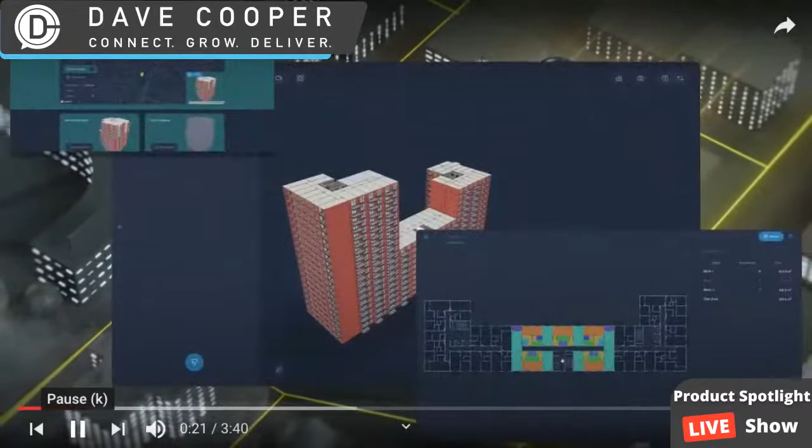Kreo Modular is a groundbreaking new feasibility tool for 3D volumetric modular construction. With design for manufacture and assembly in mind, we envisage stakeholders working collaboratively in real time on this platform, finding the optimal design cost trade-off for their scheme at the earliest stage. This video will give you a quick overview of how it works.

First, we need to digitalize your 3D volumetric components. You teach us how these components or modules can connect together to form modular units - for example, an apartment. We will then generate a multitude of different options for how these units can fit together into a single building block and work with you to select the most desirable layouts. Your rates information is also added at this point. Once this service is completed on the back end, we can begin to use the application.

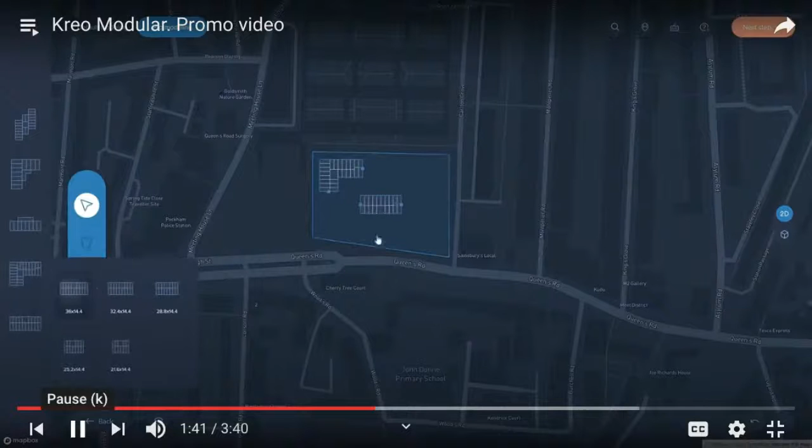First, you should find the site that you have in mind for your development. Draw the footprint of your site using one of our two design methods. First is default modeling, where you set the perimeters of your site, and our intelligent engine provides the best design options for you. Second is pro modeling, where you set out your site perimeter and then drag and drop from a sizable library of preset layouts that you selected during the database creation phase. With both modeling options, you are able to edit the 3D massing of each building block.

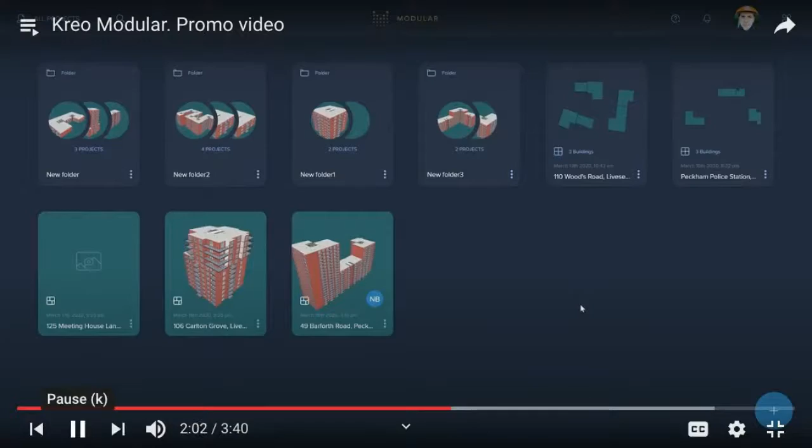I don't know if it froze up on us or not there.

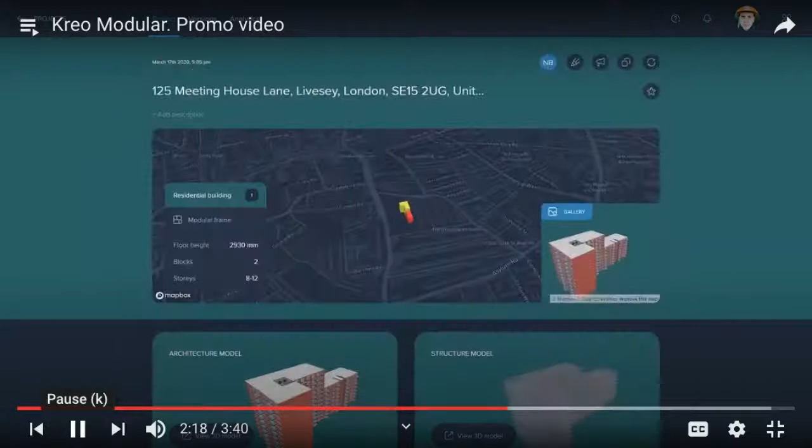The model that is produced is exportable directly to Revit, as is the structural and MEP models, but only if these disciplines have been included in your module design. You are able to edit unit mixes throughout the whole building or on specific floors. View your key metrics that are pulled directly from your model, such as the unit mix summary, the area schedule summary, and the cost breakdown summary.

Please note that these are based on your own rates, but are also editable within the application. The reports for each design iteration can be exported directly to Excel for you to compare at your convenience away from our application. Similarly, you can directly compare your creations using our versions tab. Thank you for watching, and see you in the application.

All right. So, I don't know if I froze up for a second here on this end, but that's the value and love of live streaming. So Adrian, let's jump into this.

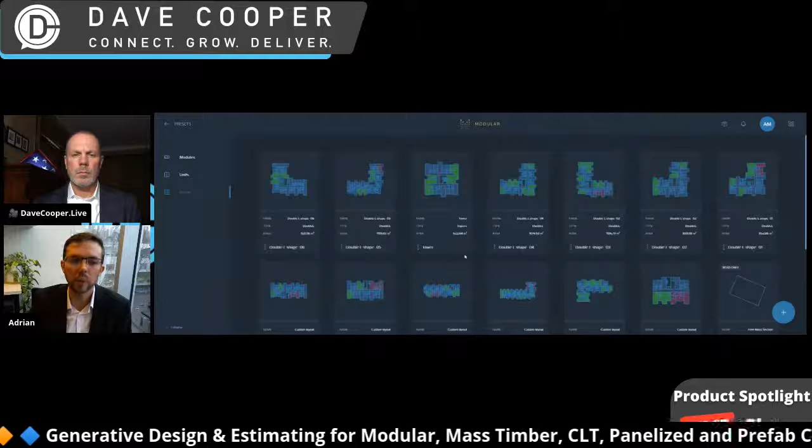I'll show you a quick example of what a library consists of, since this question came up. So we've got our individual modules here, and these are part of the source code, I guess, for our algorithm. Then we've got our blocks, and our blocks are groupings of these modules. This is how we generate our building types - this is what we're pulling from.

So let's go back home and we'll start a new project here. This is set up per whatever manufacturer you are. So if you're a manufacturer, you're going to have your own set of libraries that you already use. You're going to have your own set of blocks, and that's how the program's set up.

Is that accurate? That's correct. Yeah, we'll put in your own modules.

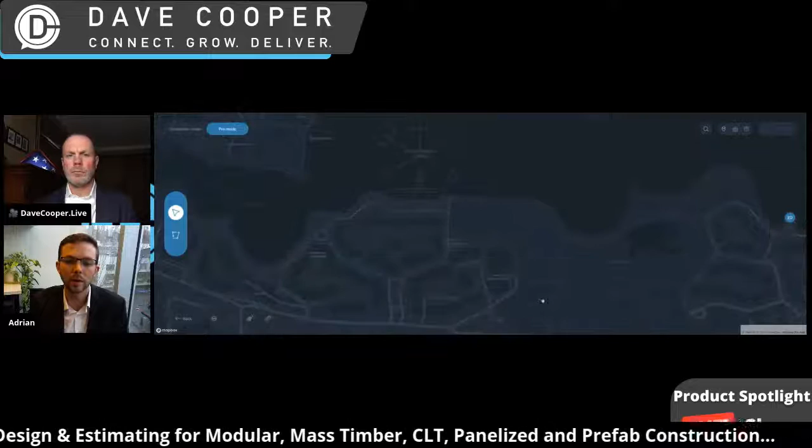The reason this is important is because every manufacturer is going to have different limitations and different strengths. So we don't want to just use a standardized kit of parts and library. We really want to have a library that's designed around our manufacturer's focus and strengths.

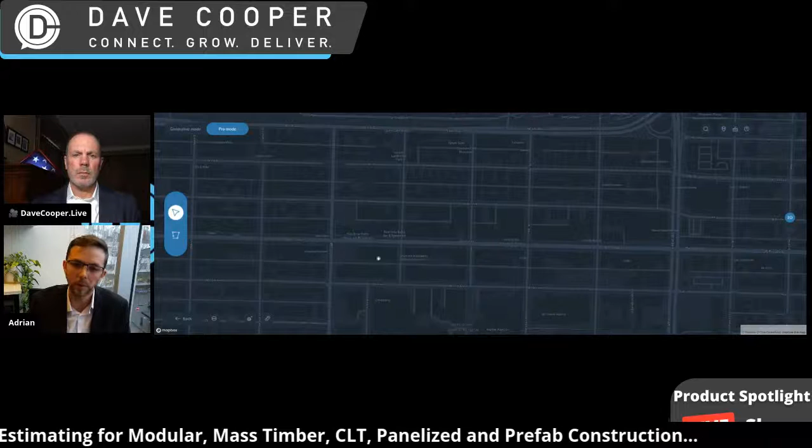So first thing we're going to do is find the location of this project that we're trying to conceive. I'm here in Vancouver, so it automatically pulls me up into Vancouver. Here's Vancouver - I'm going to zoom in on a potential lot, perhaps.

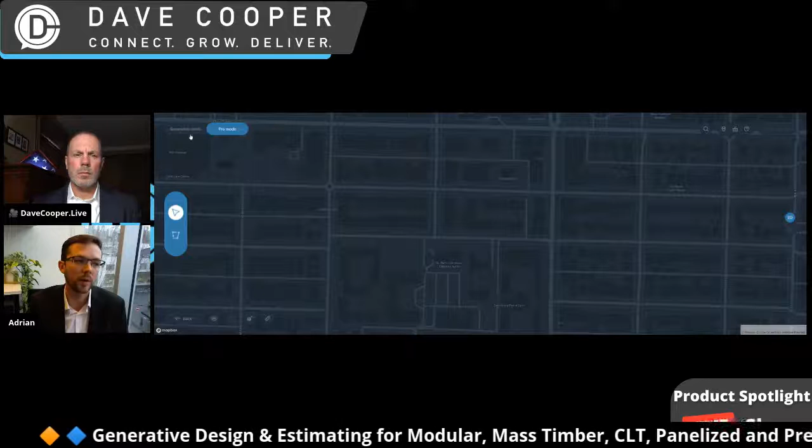We've got two modes - a pro mode and a generative mode. This is great because the pro mode is a more drag and drop method to design a smaller or more basic solution. So if we're designing a small project and don't necessarily need a generative tool, we've got blocks that we want to drag and drop and put together to design our building, we can do that.

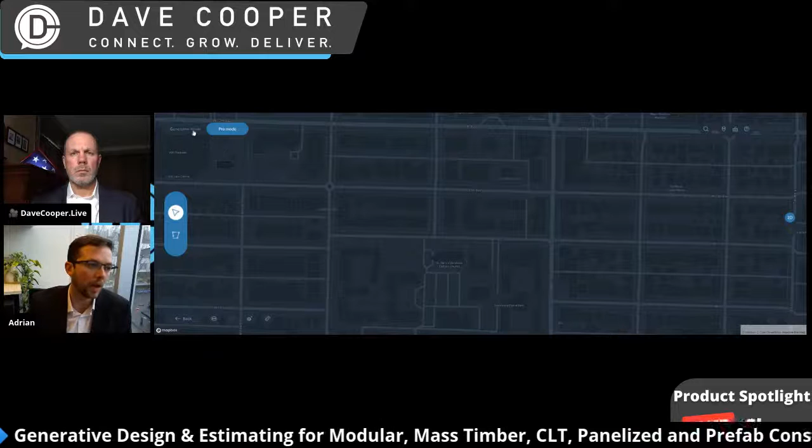But I'm not going to go through that today. I'm going to go through and just quickly show you the generative mode, because this is the part that I think is really cool, and it's what we're really known for at Creo.

So I'm going to start by plotting out a potential site. This would be perhaps a piece of land that our client owns and they want to develop a modular project on. So I'll connect all those dots - that's our site. And then based on the settings that we've got here, or the limitations...

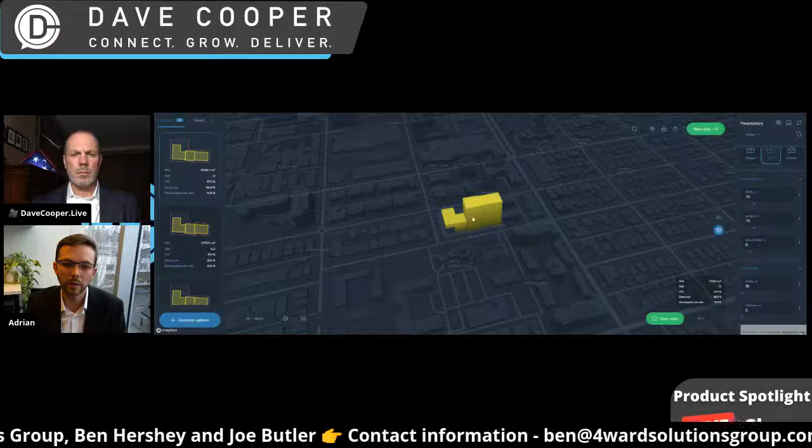Here are a bunch of limitations that we can adjust, including number of stories. We get a solution. This solution, we can quickly have a look at it in 3D if we want, see how the massing looks. We can isolate different blocks and modify them as well if we want to.

Over here, we can even go - we get a bunch of different options over here. We can have a look at all the options our algorithm generated for this site. So we'll give it a second and it'll pop up a whole bunch of different algorithms. Now, these generative options are coming from our library and our kit of parts.

So here we're getting the ability to quickly compare based on some key data sets, which one might be the best for us. And if we're sitting with our client at this stage, now we can get our client involved in helping us come up with a solution.

And maybe if this is a net zero or a passive house project and we want to take a look at the direct sunlight, that might be important. Or maybe we want to look at the FAR level for this site, or the site ratios. So this is going to help us choose. I'm going to, for fun, just choose this one.

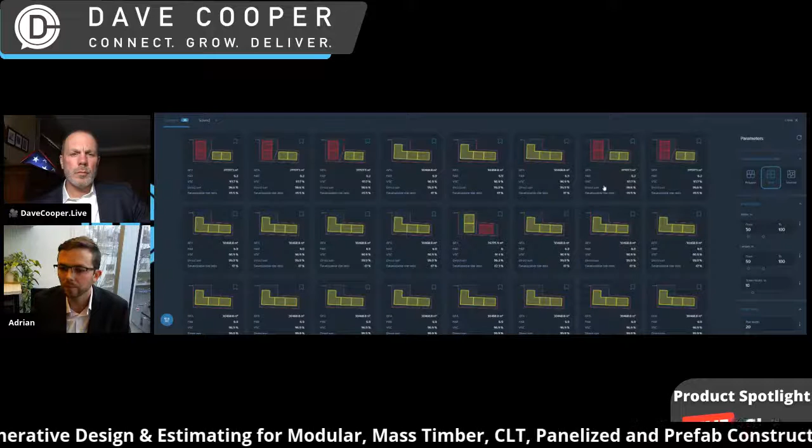Let's go here. We'll replace. Now we'll close. And so I've chosen this site.

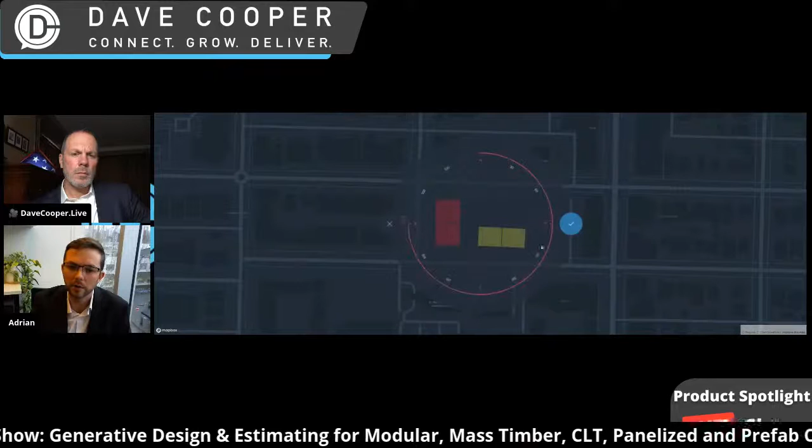So I'll move ahead and we'll get to the end of this process because it's a pretty quick process. We'll give it a second. It's going to go back to our home screen now. And now that it's taken us back to our home screen, here's the project that we just created.

In the background right now, our algorithms are computing all the takeoffs, all the details for this building. So we're going to get an architectural drawing, floor plate plans, and a takeoff of all the components in the building structurally. I'll show you an example of what it looks like when it's done. It takes about 3 or 4 minutes to complete.

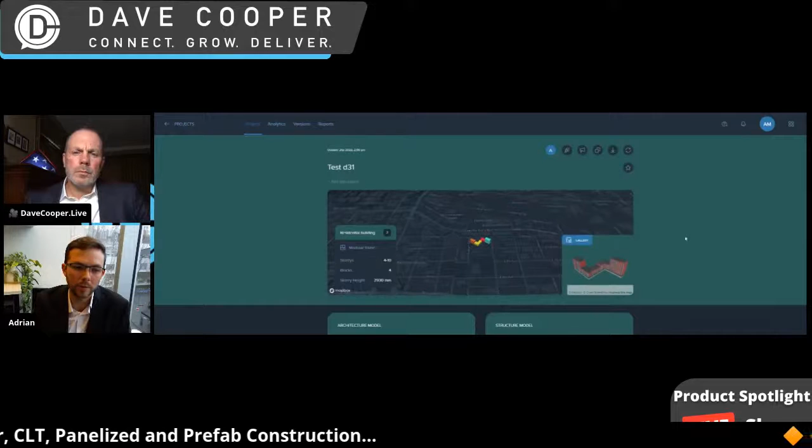So I'm going to go over to a project that's already done. It's a much larger project, but I'll give you an example of the kind of analytics and reports we get after about 3 or 4 minutes of waiting. So here's the main page of our completed project. It gives us a little bit of data here.

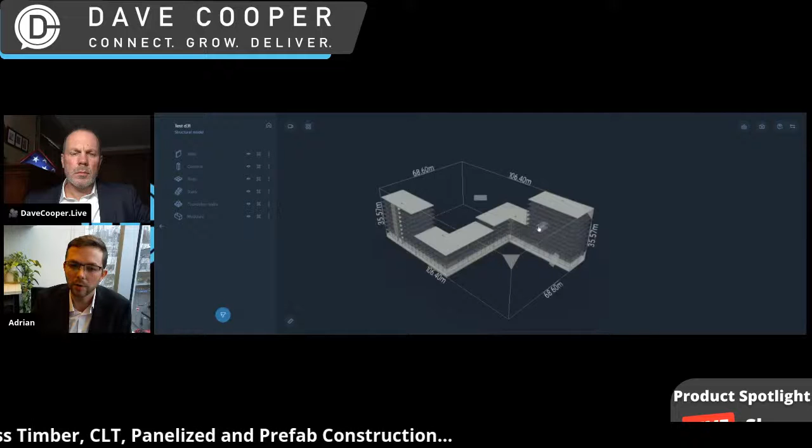So we get a structural model, and we can collect the structural model and really hone in on the different elements of the project. So if I want, I can find an actual module. This is a steel-based system, and we'll have primary and secondary load members. We can manipulate the model. We've also got our cores, our concrete cores, and slabs here as well. So that's pretty neat.

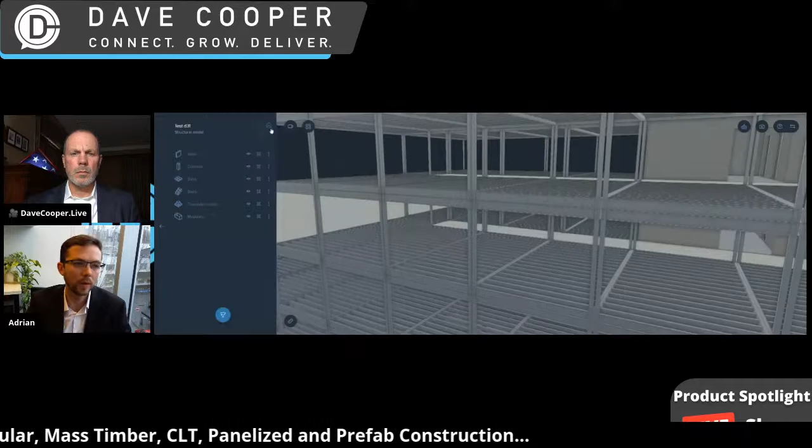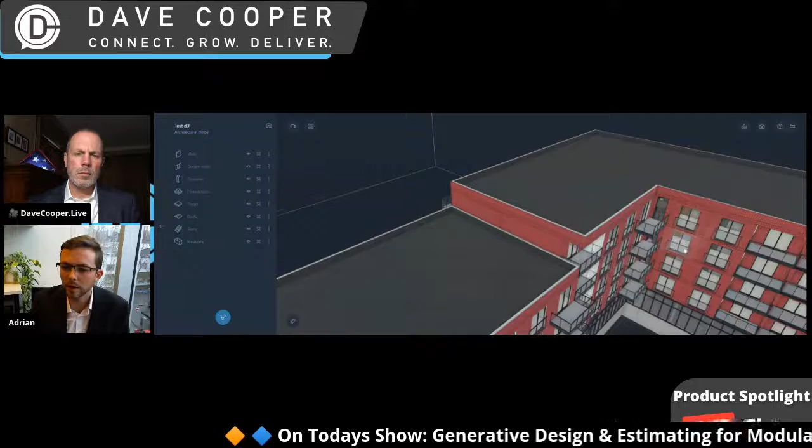We can go back home here. We get an architectural model as well. So if we want to show a client exactly what the project is going to look like, maybe you want to zoom in and isolate a module and check out the layout and partition walls, we can do that.

So that was showing, as Henry Mickelberg was asking, the facade and the balconies on this particular model. So let me get this right.

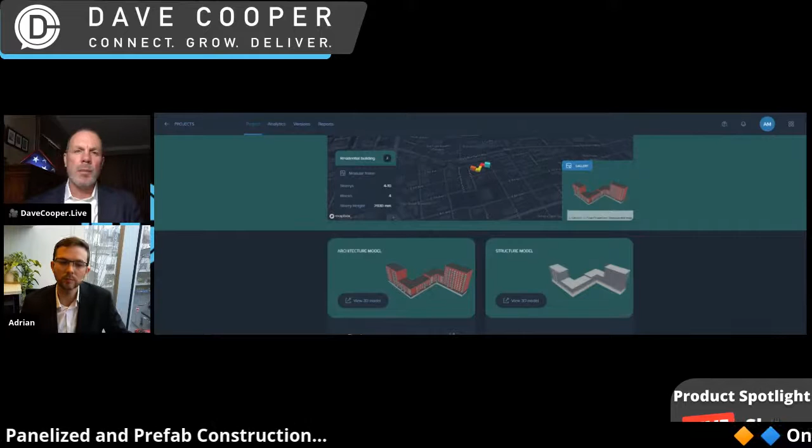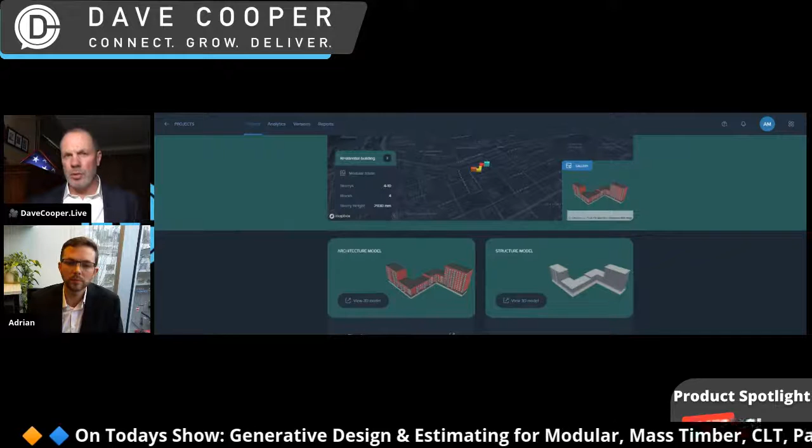And I know the comment came up with some other generative design tools like Archistar and so forth. But basically, where your platform seems to be super strong is you find the lot, you plug in the parameters, the zoning, the codes yourself versus the system generating that for you. But then your program takes that and generates multiple options of what you could potentially develop on this site. And then you choose from those options. And once you choose from those options, it takes 3 or 4 minutes to generate that design to the details that you have specified for your manufacturing facility.

So it's not just a conceptual design, it's a super detailed design, and this all happens within just a few minutes. And I think that's where the power of this really comes in, because now you can take what you just showed us, that big building, within a day and walk a client through what your options are.

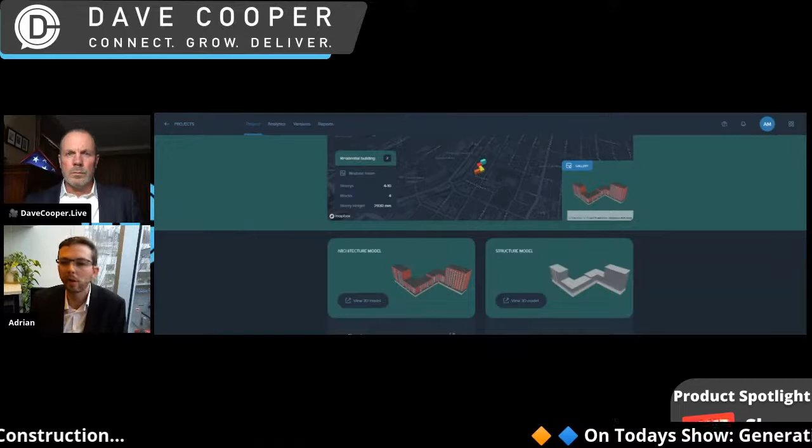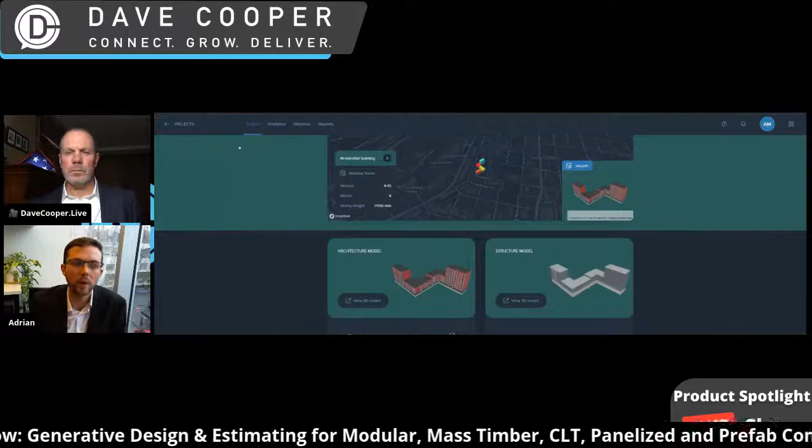That's correct. And that's why I think it's really going to be beneficial to a lot of manufacturers who unfortunately have to turn clients away because they don't have time to develop something like this and price it out for a client that isn't what I would call qualified. Right, so now you're able to widen the net and lower your acquisition cost on projects.

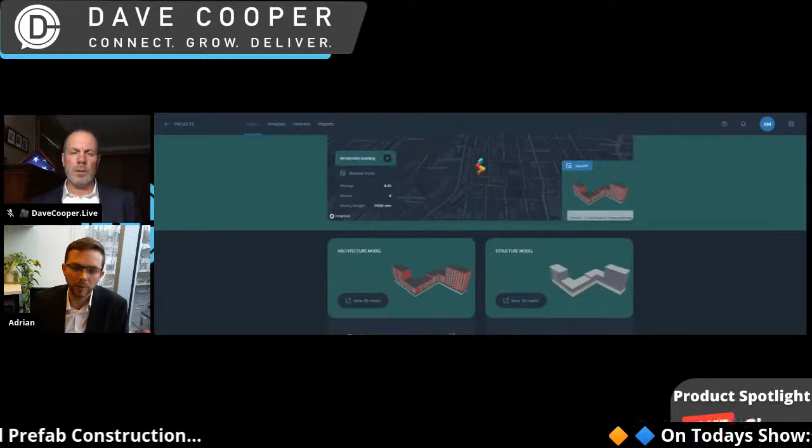And I think the other cool thing is you're providing a client experience that is very complementary to the construction experience that client is going to have later in the project. It's extremely innovative, it's fun, it's exciting, and it's fast and accurate and high quality.

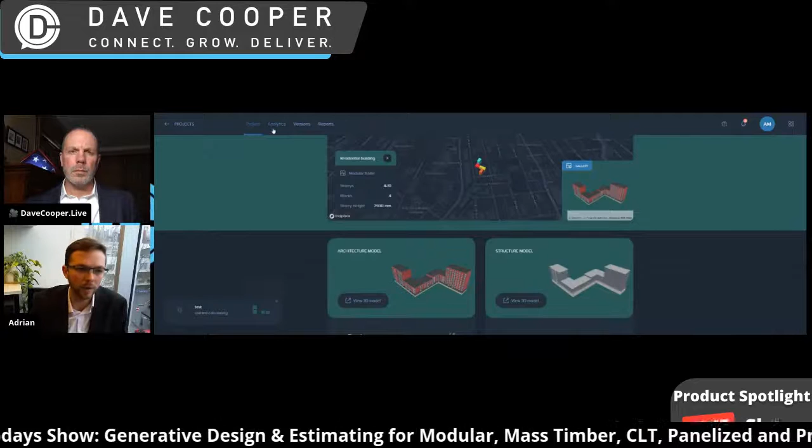I'll give you another example of some of the data that we get here because this is powerful, and this is what's going to help that client make the decision to move forward with you, and it's also what's going to really help your estimating team. So here's an example of the data that we get, and of course this is data that's assembled based on that individual module and those individual groupings' cost.

So you do have to do a little bit of work on the front end when we're putting your library in with your estimating team to cost out those modules, and also if you're looking at non-modular costs like demolition or foundation work. There may be some averaging and costing you have to put in if you choose to present this. You don't have to, but a lot of factories may want to incorporate this. Once that's done, this is going to do a lot of that heavy first-level estimating for you, and it's going to eliminate a lot of mistakes that happen at this stage, helping you generate a much sharper estimate.